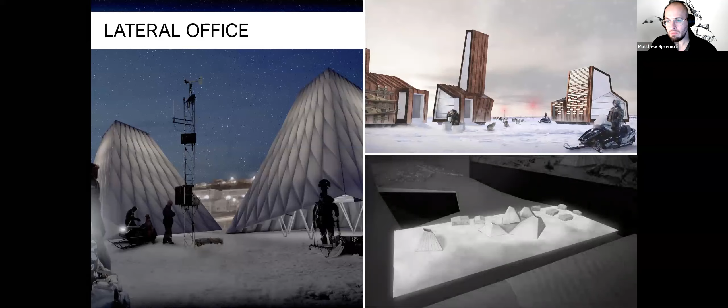So generative design, for me, I can always say that I really wish I had these kinds of tools. These are some examples of my previous work. This is from when I was with an office called Lateral Office, imagining what Canada's Arctic would look like from a design perspective. You can kind of see that a lot of the designs are meant to have a performance element, how well will the structures perform relative to wind, snow or sunlight. In a lot of cases, we as a team were not able to explore many options because we didn't have the tools to make lots of iterations quickly.

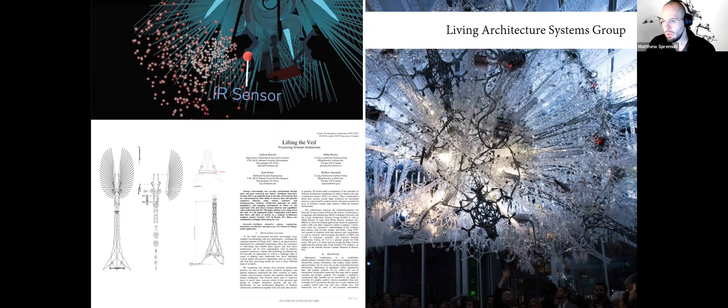And finally, I was also working with a research group called Living Architecture Systems, and it was a similar challenge. We were making these interactive and quite immersive installations. The challenge was how do we balance the goals of having these pieces be interactive, with the audience below, along with fitting into the space and performing to a degree with the environment it was put in. As you can imagine, with all this detail, it was very challenging to make iterations. That's why generative design would have been also handy in this situation.

Generative design comes into play when I'm trying to explain to students how they can leverage parametric design tools such as Dynamo or Grasshopper to be more useful for a goal they're trying to achieve. Now I work with the Autodesk Technology Centers, and I helped found the Toronto, Canada chapter Technology Center, where I get to work with people exploring their designs and innovation projects. In some cases, I get to introduce them to what generative design is, both at the product design scale and at even more large scale, such as in AEC.

So my role with the technology centers is generally bundled under what we call Autodesk's Chief Technology Officer, or CTO. Under the Technology Center, I help run an open innovation and residency program that we now call the Outsight Network. But there's two other levels in which Autodesk CTO exists.

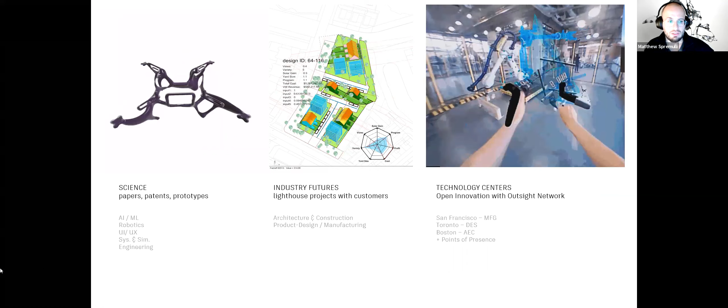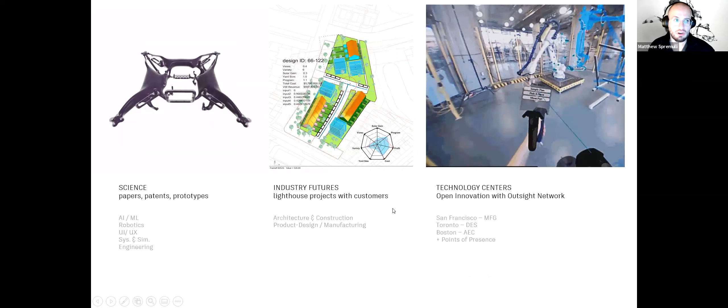Without describing too much about what each group does, I'll just give an overview that the science teams are mostly interested in doing research for papers, patents, prototypes of new software. The industry futures team, they're mostly working with customers on what we call lighthouse projects - very high profile projects that push research, but also are grounded very much in a real project. And as I mentioned, I'm part of the technology centers that helps a very wide spectrum of teams and a very high quantity and volume of teams to achieve their innovation goals.

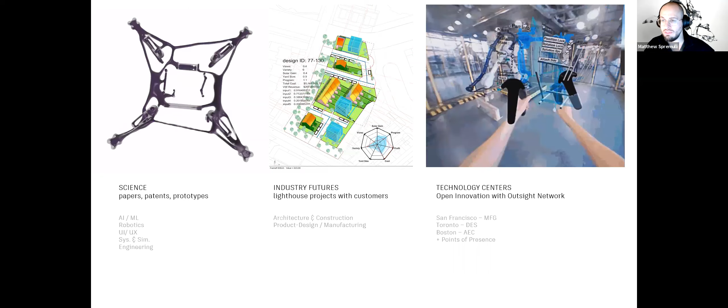So now that you know a little bit about me, I'm going to talk about what we're going to cover in today's talk. First, we're going to talk about what even is generative design. Why is it emerging now? Why does it exist in 2019 and 2020? Why does it come up? And what versions of generative design exist?

Then I'll talk about, great, we have this approach and these technologies - how are people using this to solve real problems? So we'll go over some case studies, both from Autodesk research and from some of the residents that I mentioned in my technology centers.

And finally, I'll talk about tools - how can you start experimenting with some of these generative design for AEC experiments? We'll cover mostly Autodesk Refinery, which is the generative design or generative algorithm engine. But there's also some adoption into Revit 2021 that makes it very easy. And I'll talk about one case study where that is possible.

And finally, I'll talk about how you can get involved with Autodesk. We'll talk about the technology centers and how you can experiment with generative design if you're interested.

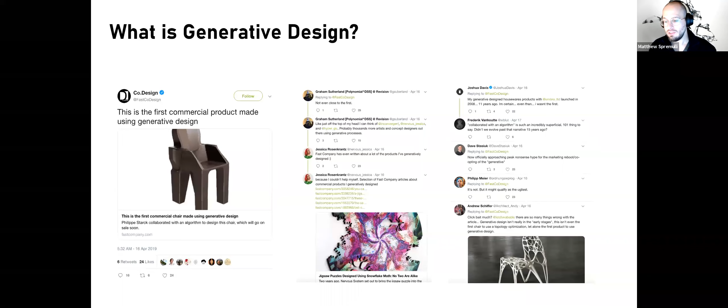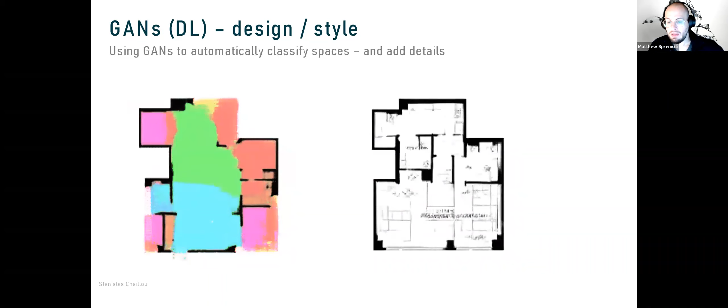And then we entered a different era of design called parametric design, which many people are starting to adopt and become more comfortable with the approach even now. This could be through tools like Revit or even visual programming languages like Grasshopper or Dynamo. And we are now entering another age of design that we are calling generative design.

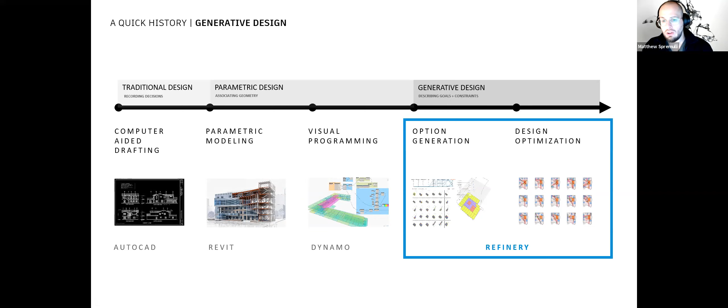This is even further away from the other explicit modeling tools, where you are describing as a designer goals and constraints, and the computer, or more accurately, the software, will come up with options for you or will optimize for you. And so this is what we're going to talk a little bit about further into the talk.

Another way to look at this topic is to basically look at it from a mixture of history and theory and different movements that have contributed to this period we're in now, stretching all the way back to Walter Gropius and Le Corbusier, Buckminster Fuller with modularity concepts, stretching into parametricism and all the things that feed into what we now call architecture and AI.

I like to pause here and to say that generative design is not just about tools, though. It's really a design process, and it's really a design approach. In my opinion, it is really founded on 4 core technologies. There is parametric modeling, things that we're used to, like Revit, Dynamo, Grasshopper; tools like simulation packages. This could be like Ladybug or Honeybee, packages that help you understand what the performance of your design is.

Optimization tools, and we'll talk about that further. This is where the genetic algorithm comes in. And finally, some data visualization tools to see all of the different iterations you might have made.

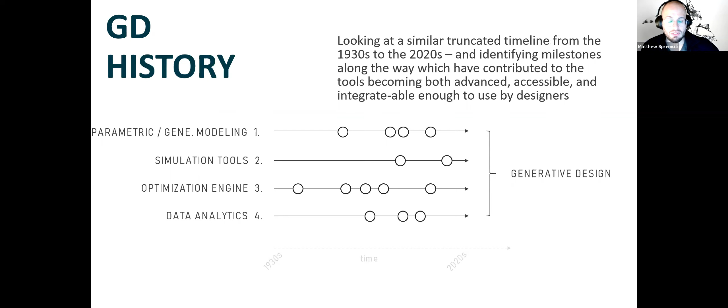So I'm just going to go over a very brief history of fundamentally going from the 1930s to the 2020s, and focusing mostly on the parametric modeling history and the optimization engine history, because the simulation tools can change and can adapt and can be modified to your needs, and so will the data analytics.

So the parametric modeling history can stretch back, I would say, in kind of analog and physical forms to 1905 with Antoni Gaudi's funicular maquetas. These are basically these physical models that helped him, like a Grasshopper script or a Dynamo graph, pull on the different forms and see the impact that it has with these pulleys and weights.

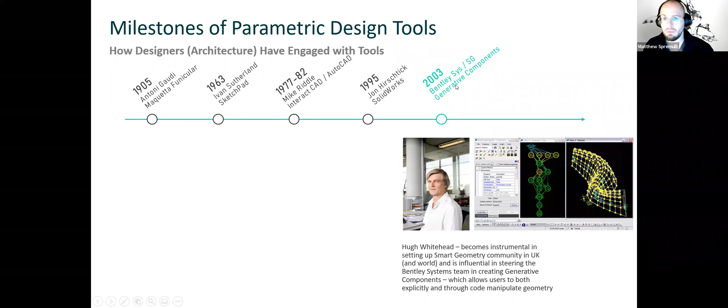Skipping ahead into history, after we get tools like Sketchpad or AutoCAD or SolidWorks, we really start to see visual programming, a combination of explicit modeling and associative rules, show up with Bentley Systems Generative Components. And then, of course, tools like Grasshopper and Rhino show up very well with the plugin Explicit History in 2007. And with Autodesk, we have the Revit tool come out in 2000 and Dynamo come out in 2013.

So we know what parametric modeling is. What about optimization? The evolutionary aspect of generative design is truly critical, that allows designers to spend more time generating forms and seeing how they can lean towards higher performing options. The key thing here is that the computer needs to help decide which option is better performing. So this is where the intelligence aspect comes into play.

And there's 3 figures that are really important to this history. The first, I would say, is Alan Turing, who basically proposes the question, can machines think? And is really seen as one of the early fathers of artificial intelligence. Frank Rosenblatt is an American psychologist who positions the idea that there could be a computer that can make informed decisions. If they're given enough information, they can pick better candidates over others.

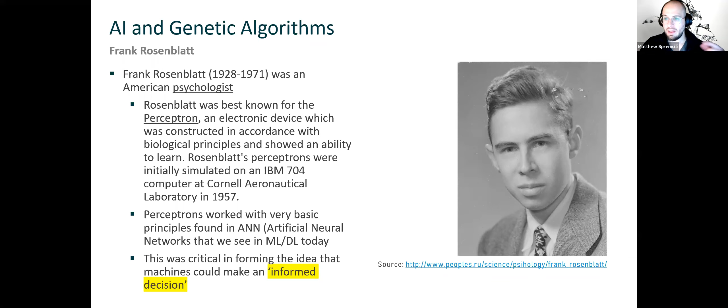And finally, we have John Holland, who only recently passed away, but is an American computer scientist who invented the idea of the genetic algorithm. And he basically proposed the idea that this genetic algorithm would be comprised of 4 primary principles: reproduction, selection, crossover, and mutation. And these are the 4 core principles behind all of the genetic algorithms we use today, whether it's Wallacei for Grasshopper, Discover for Dynamo or for Grasshopper; Galapagos uses the same principles. It's basically all there from this one person.

So again, the recap is that we have these 4 core technologies, and they're all coming to maturity now, 2019 and 2020, so that everyone can combine them together to make what we call generative design as an approach.

So this is where I like to return to my analogy of farming or agriculture. If generative design is about making geometry and then evolving or optimizing the options, it's kind of like farming. Although in this case, we're not farming for food. So what's a good Halloween reference for today? Let's take a look at the case of a pumpkin. This is a very popular vegetable in North America around Halloween time.

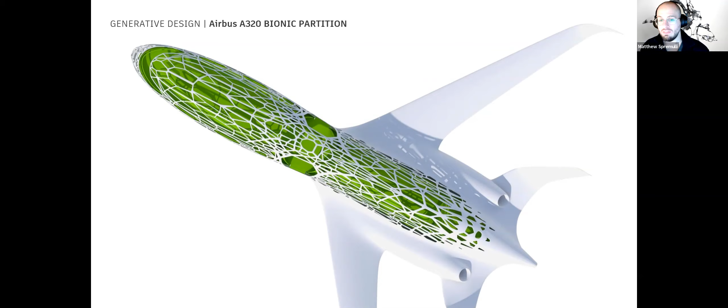So let's talk about these in a little bit more detail. Let's talk about the Airbus Bionic Partition. Some of you might have seen this example, but I'll go over it again for clarity. So Airbus came to us with this amazing project. They're like, this is what we want the future of airplanes to look like. We want it to be very lightweight. We want it to save lots on greenhouse gases. And we want it to feel very open, lots of windows to see the outside.

And we decided, cool, that looks amazing, but maybe we can start with a smaller project to be more real. So we decided to take a look at this, which is a small partition, a wall, an architectural feature even inside of an airplane. If you've seen the Airbus models, this is where the cabin crew sit down. Normally this is made of sheet steel and it's capped off with a few different panels. It's a very dead weight and heavy component.

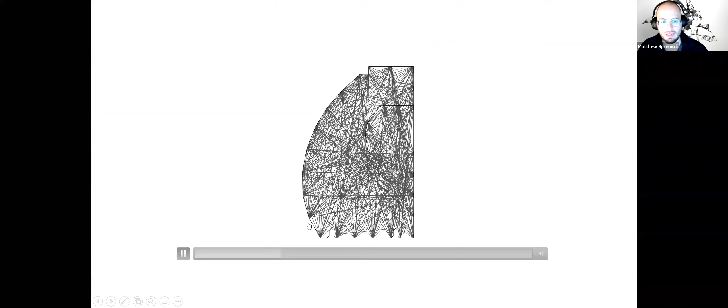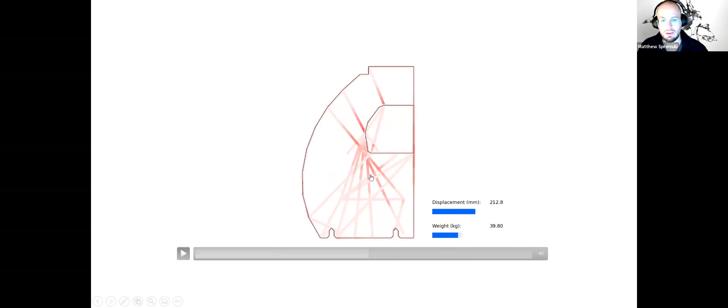So we decided to think a little more creatively about it, which is to break the profile down into its outer profile, and then think about how we could stitch together different trusses in between it structurally. And then let generative design find an option that would be a good balance between weight and displacement. So this is one goal, displacement. This is how far the wall will deflect under load, and we want this number to be small. And then weight, this is another goal. We want this number to be small as well. But if you make it too lightweight, it will displace more. So it's a trade-off.

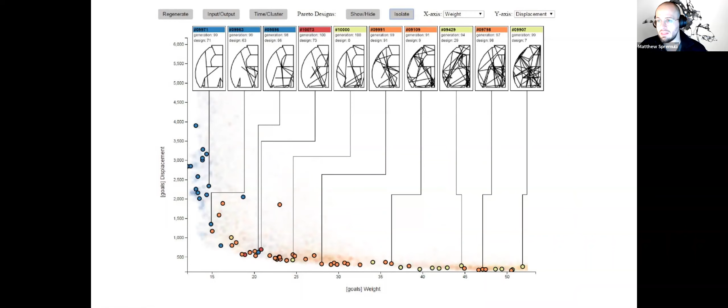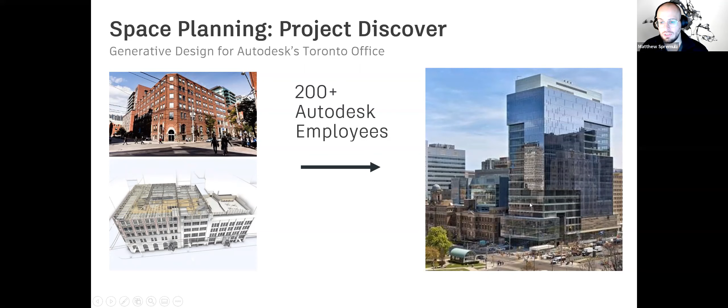So the next project is Autodesk's Toronto office. And here, in this case, we had to move from an old office with brick and wood into a brand new office in the center of the city in an innovation district. We moved from this area of Toronto to closer to what we would call the innovation core of the city. And here you can see that we basically were occupying the first 3 floors of this building.

And when we were making the move, we wanted to interview all of the Autodesk employees. What do you prefer when you are coding, when you are making your products, when you are designing tools? We have lots of different products that Autodesk offers that are being developed in Toronto. And so each of these different groups had different preferences. So we interviewed them all and got all of their different specific attributes of what they preferred in terms of lighting, acoustics, comfort, noise, things like this.

And we were able to combine them all and distill that we had 6 goals that we wanted the design of the office to try to achieve. These were low distraction, so being more quiet; adjacency preference, which is basically having connection to your teammates; interconnectivity, which is kind of in opposition to low distraction, being close to different areas; daylight, which is fairly straightforward; views to the outside with the windows; and work style preference.

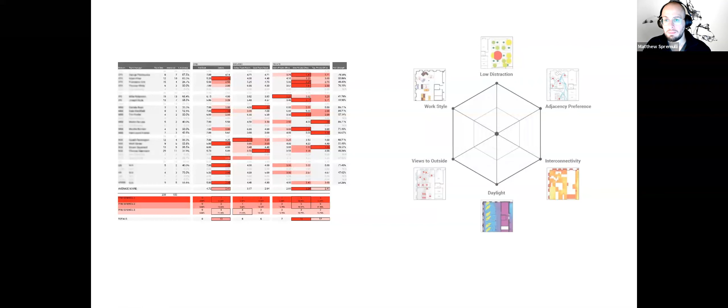Each of these goals needed to have a quantitative, numerical way to break them down. And so for each of these, we had a scoring equation that would then get normalized as a value out of 10 that we could score each design. So in this case, there were some inputs and there were some outputs going from a score from 0 to 10. And here on the right, you're seeing essentially what this custom simulation tool is doing both graphically, and there was a numeric value. Here's what work style looked like: interconnectivity, low visual distraction, and daylight. And finally, views to the outside.

So it was great that we had these goals. And now what we needed was an architectural concept to tie it all together. And so we really like the idea of thinking that an office is like a small city. A small city has lots of neighborhoods, lots of different districts. And so that's what we would make each of the product teams. So for example, here there's a group working on Fusion 360. Here is Autodesk Research. Here is Autodesk Sketchbook, Alias Automotive Tools. So each of them had their own specific area.

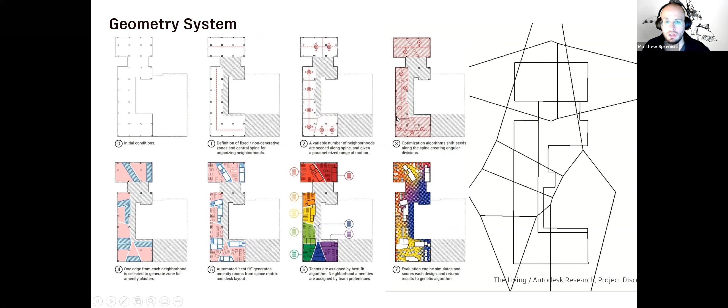And how did we imagine this coming together? This is basically how we laid out the geometry of the office. So we basically had the initial conditions of the office. We had some zones that we could not touch in gray and a main path. Each of the different neighborhoods had a center and could move back and forth. And it would make essentially the cell of a Voronoi that would make the edges of these neighborhoods. And they could move around, they could shift.

One edge of the neighborhood would have what we called an amenity area. This could be a lab, offices, meeting rooms, VR labs, things like that. And then we would lay out the desks afterwards. And each time we did it, you could move these around and it would automatically update all of the goals. So here on the right, you're seeing what those look like. And here's this little animation of blocking it out, laying the spine, putting the centers with the Voronoi, letting the amenity bar show up with the meeting rooms, desks, and then seeing the goals each time.

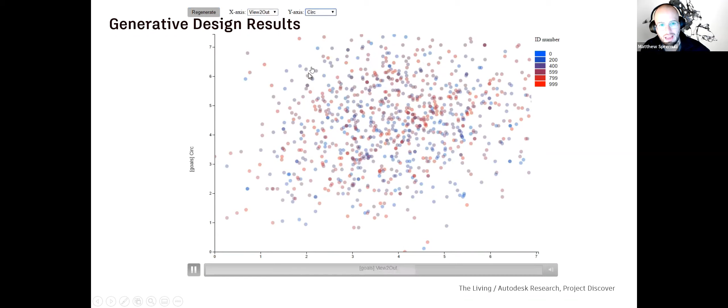And then we let the algorithm run. And the algorithm ran 10,000 times. So we had 10,000 floor plans to choose from. And always with generative design, there's the challenge of what do you do with 10,000 options? So this is where the data analytics tools are helpful. Here you can see all the different iterations getting plotted on the goals of circulation or views, and you can see how they look when plotted on this graph.

Once we selected one version, this was again interviewing all of our employees and seeing which ones they like. We were then able to take a final version to completion. So this is what our neighborhoods looked like. And we finally took them into Revit for detailing. And now we're all moved in and we are almost 3 years into this project. So a lot of people will ask if we'd like to modify it. And that is an ongoing research project to see if we can monitor the inside with sensors to see if we can pick up data that would adjust the interior.

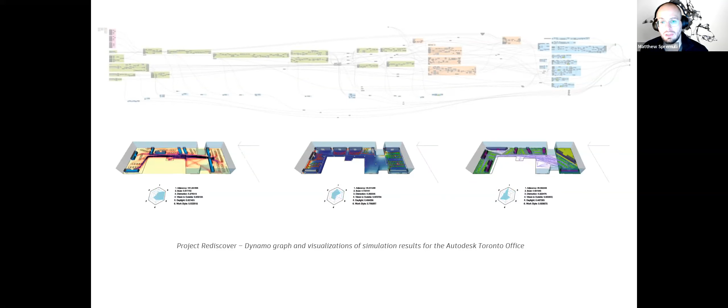And if you want to experiment with this graph, I can share with you a link afterwards. We made this Dynamo graph public, so you can access it. One of our researchers has shared the entire Dynamo graph on his blog called Through the Interface, and it's called Project Rediscover. And I'll share with you the link after, and you can play around with the Toronto Autodesk office.

And if you're wondering, I sit right here, if you ever want to mess around with my office.

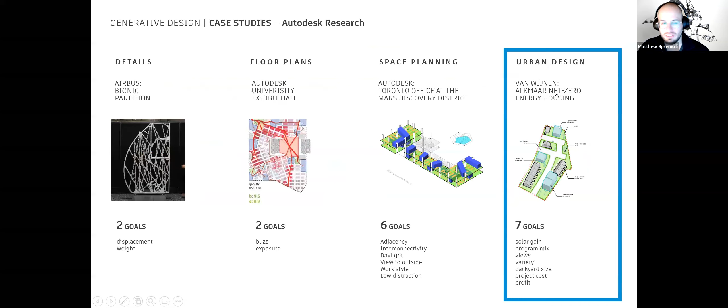So a final project from Autodesk Research is with this group that we worked with at an urban scale called Van Wijnen. Van Wijnen is a Dutch housing company, and they make prefabricated homes that are modular. They're very forward thinking. They like to use augmented reality to see how to lay out the mechanical, electrical, and plumbing of all of their prefabricated components. And they like to experiment with technology even at the larger scale.

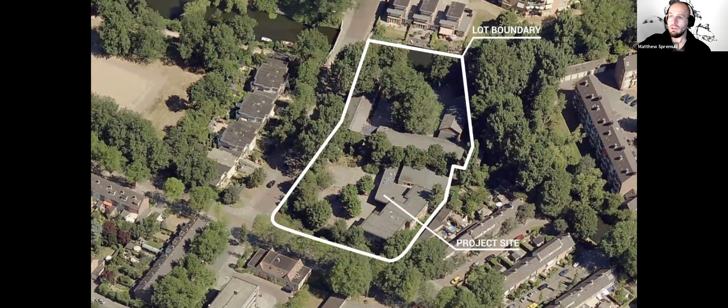So this was one place that they wanted to introduce a design, and they wanted to use generative design to imagine lots of design options. So really they have 3 units that they work with: a single story unit, a double story, and a triple story unit. The trick is, where do you put which units on the lot? So we needed to understand, like the Autodesk office, what are the constraints? What can we not touch? And what are the things that we need to stay or stick with?

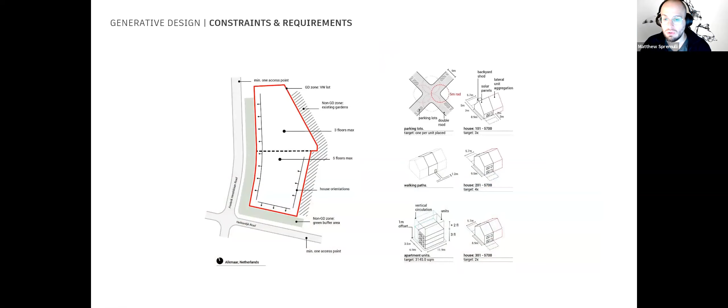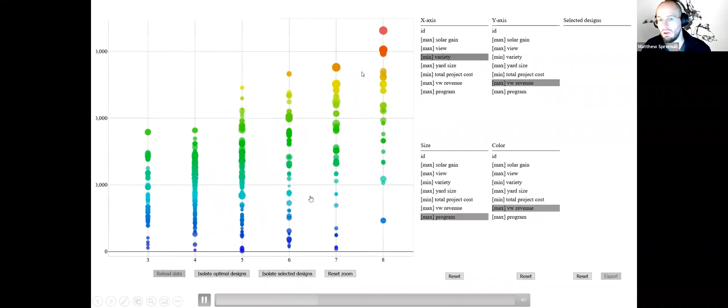And similar, in this case, you can see the data analytics technology is getting better and better. This is now using Autodesk Refinery as a tool. So it's no longer Autodesk Research. It's now an Autodesk product. So here's different ways of seeing the designs and them being laid out, and how you can organize them on an X and a Y axis, as well as with size. So the bigger the circle versus the smaller, and the color. So lots of ways to see your design ideas.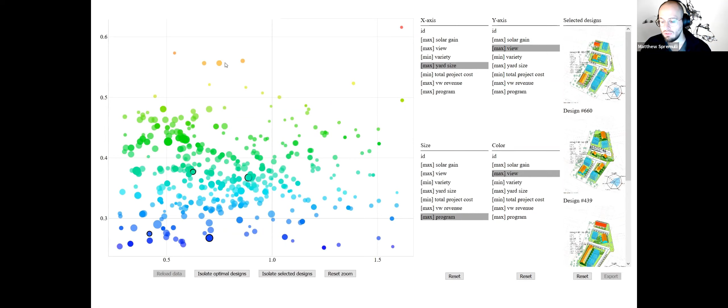Like the other projects, we selected a few candidates that were well performing. There isn't one good one. There's usually many options. So we had to take a few options and go back to the customer and say which ones make the most sense to develop. So Van Wijnen was so happy with this process that they wanted to turn this into a tool that they could use for any site. So they wanted a generic tool that they could apply to new projects.

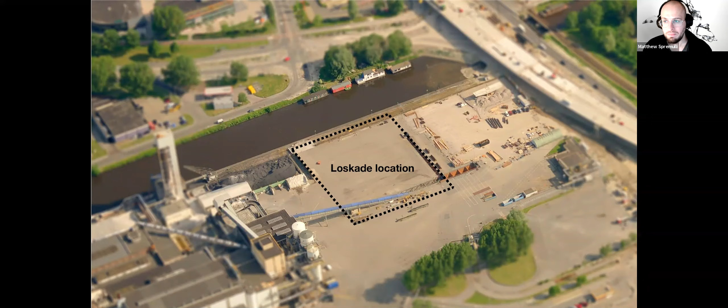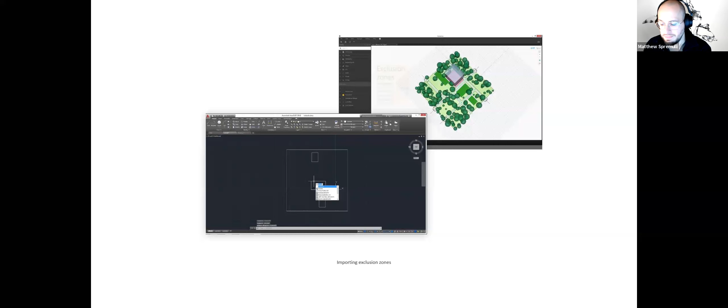So the process is usually where you have your constraints and requirements and you generate a form. You then see how well it scores to your goals, and then you evolve the design over and over until you get options that you really like.

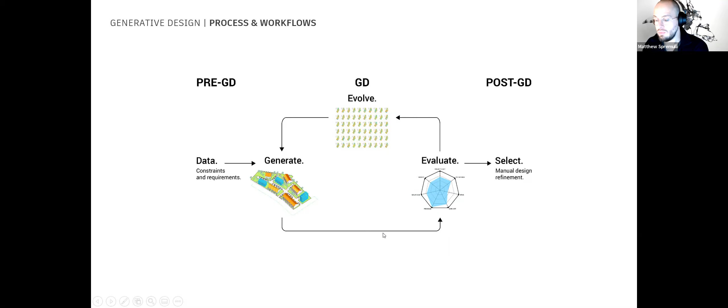So how are other people, how are customers using this who are not related to Autodesk Research? These are examples that I've helped with in our residency program at the Technology Centers. The first is a short video that I'm going to let play.

Let me know if the audio comes through. Can you hear? No? Oh, darn. Okay.

Okay, I'll talk over it. Sorry about the technical problem.

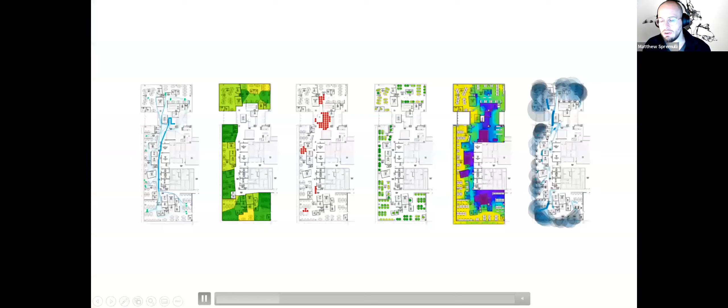So what we did is we ran a 2-week program in Toronto where we invited 6 teams to come in to try out the software. So we had University of Toronto professors, we had people from MIT, we had Arup Engineering, we had a construction company, a Brazilian startup. So lots of different groups, a very wide spectrum. And we wanted to see what they would do with their projects.

A way to get feedback on the tool and to get a chance to see what people would solve with the new approach. So we ran it at our technology center in Toronto, and I was working with some collaborators from research to work with all of the different participants to come up with their designs.

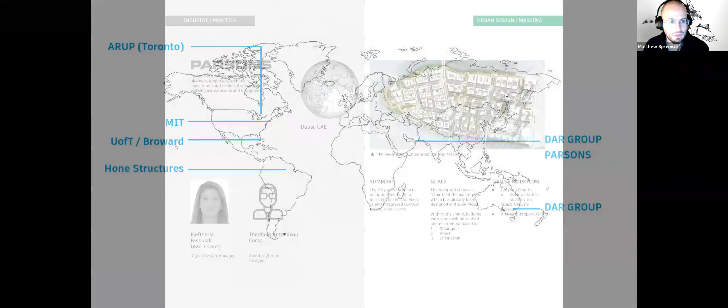So we had Arup in Toronto, MIT, University of Toronto, Florida, Broward County, Hone Structures from Brazil, Dar and Parsons Group, and another group from Dar to join. And I'll talk about a couple of these projects because maybe these are similar to challenges you have.

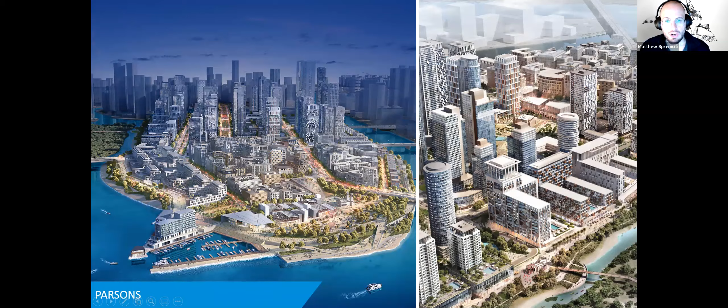So with Parsons, they are a big construction and contracting company working mostly out of the Middle East. And they had this big project, a master plan for a city in Reem Island. And this is an artist's conception of what it will look like. But they knew that it would be broken into these general quarters or neighborhoods. But they needed to know what each of these blocks will look like.

So towers and podiums, how does it work? How should they be designed? So there's many options that they could pick. 1 tower, 2 towers, mixed podium. What's the best solution? And they decided to look at all of these different options in Dynamo and then be able to essentially test them according to goals related to sun analysis, courtyard size, sun exposure, views, and how much gross floor area or GFA they should include.

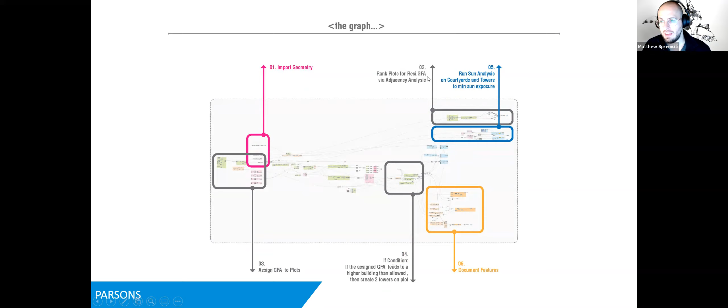So here are some examples of them looking at a podium plus a tower and seeing how well it scores to main attractions for views. And the second goal that they really wanted to get, because it's in Abu Dhabi and Dubai, they really needed to make sure that the courtyards would not be too hot, to be comfortable outdoor space.

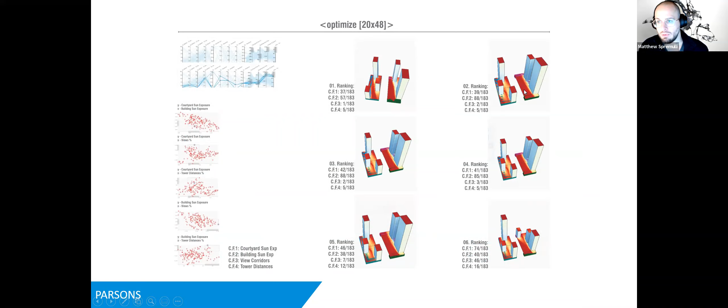A second team was from Brazil. They're called Hone Structures and Bravo Engineering. They really wanted to make expressive, occupiable trusses or concrete beams. And they thought that this was a great aesthetic to pursue with both architects and engineers. The challenge is, how do you lay out the rebar or the reinforcement bar inside of these uniquely designed trusses?

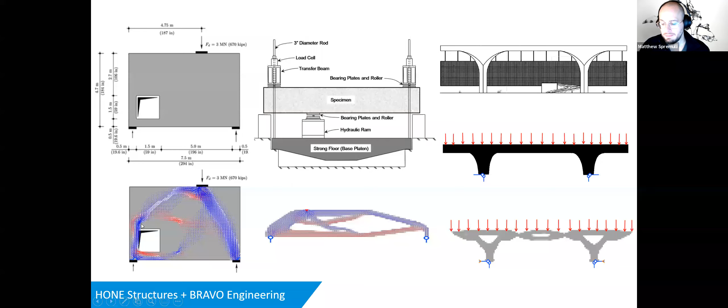So they brought it to a research level where they wanted to take a simple object, apply a load and an obstructing feature, and then find the most optimal shape it could take. So here they're experimenting with some of our other tools in Autodesk. This case, it's Fusion 360. And they're using Fusion 360 to apply a load and then see where the predominant stress lines will show up in that wall of potential concrete.

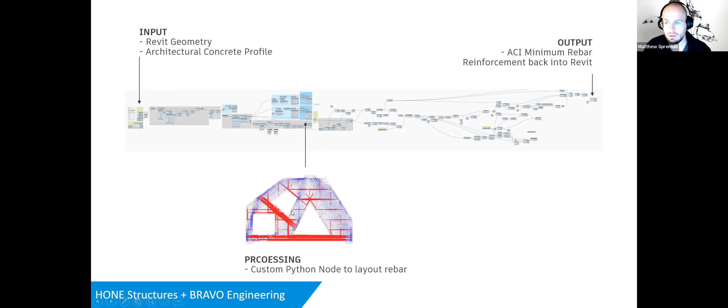Once they had that shape, then they brought that shape into Dynamo as an input, as a Revit geometry piece. And the output is that they wanted to have the minimum rebar reinforcement. And in the middle, they made their own custom Python node to help lay out where the rebar should go. So in the end, they were able to finish their script, which was great, and start to make physical prototypes from this experiment.

Speaking of concrete, we have other construction companies using the same technology now. So in North America, there's still the preference to have concrete laid out with formwork like wood structure, but people want to start getting to 3D printed formwork. So we have a construction company in the program that has tall towers, and they want to know what is the best way to lay out the formwork for uniquely shaped towers as they go.

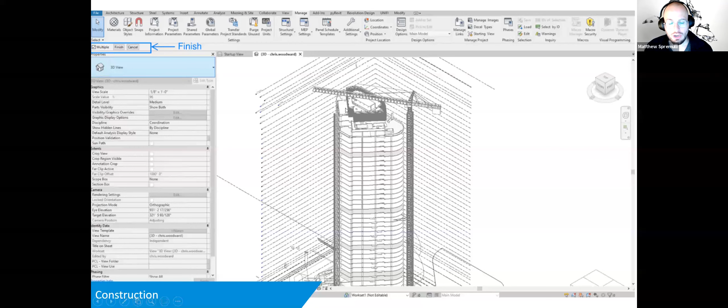So in this case, this is using Revit 2021, and you can see that now you can access generative design right inside of Revit. So you don't even need to use Dynamo if you have a simple program. In this case, they broke the tower down into the profile, and they were able to see what the supporting buttresses of the concrete should look like. And they needed to know, if they're going to 3D print this formwork, what is the optimal geometry that this formwork should be laid out as.

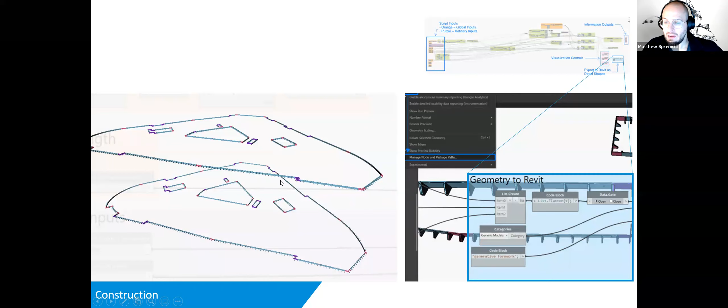So here they want to minimize the shortest pieces. They want to reduce the amount of 3D printed pieces. They want to minimize the unique pieces, so reuse more and more pieces, and minimize the volume. And you can see here they're using Refinery in order to get an option for the concrete.

Okay, so I'm going to take a quick break. Yuko, maybe we could ask everybody if they have questions so far, or if they have ideas about what they would maybe use generative design for. Yeah, sounds great. Okay, thank you for the presentation.

Here's a good example. In real life, we had our Autodesk employees say they wanted something called adjacency preference. What is adjacency preference? It's not like daylight or views to outside - those two are easy to measure, there are tools and plugins that can be easy to adopt into the workflow. But something like adjacency preference and interconnectivity are very subjective, and we needed to take it from a subjective idea and turn it into something that could have a formula. So you do need to try to find a way to turn it into a quantitative formula number.

This is where the art of designing with generative design comes from. It's a challenge, everybody knows, but that's the only answer I have for you right now - we had this thing which was shortest path plus a vertical multiplier. We had to come up with our own tools to measure what adjacency preference could be.

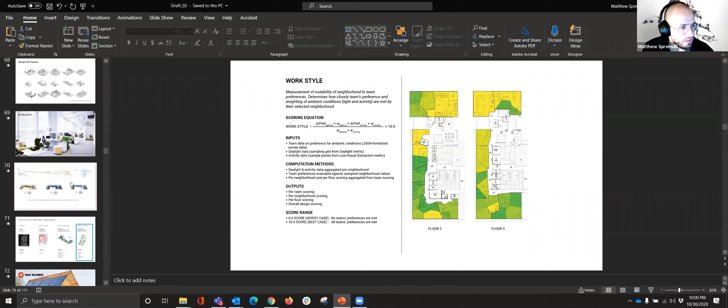Yes, so let's say we are looking at our Dynamo graph. For each of the goals, if it's a custom equation, you would make that custom equation inside of an equation node inside of Dynamo, or something like a Python node if you wanted, or you could build it more manually with lots of different nodes together. But you can change it at any time - it's just how you want to measure each of your designs.

Okay, thank you, thank you. That was a great question. It's always hard to work with quantitative, qualitative measures. Does anybody else have a question or a comment?

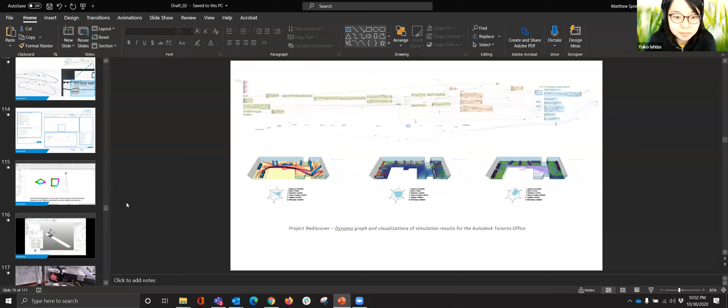Also, I have a question so far, and thank you for the presentation. There's a lot of possibility for how we use generative design, but I have a question for each project - how do you divide the tasks? You are making Dynamo code for each goal, and I'm interested in how you work as a team to develop this Dynamo code, because for me it's really difficult to divide the task in Dynamo, and we always run out of time because the Dynamo coder is only one person, or we cannot collaborate well. How do you experience that?

That is another great question. So usually what our research teams do - let me see here if I can find a good example.

Yeah, okay, let's see. Usually what we do, I guess the office is the best one I can think of. So we usually like to divide it up into two primary tasks.

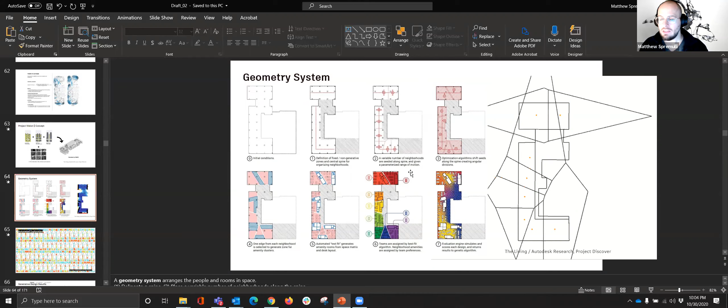Task number one is to come up with the geometry system. This is like parametric modeling. It's really no different than what you would normally do with Grasshopper or Dynamo. Someone needs to have the geometric rules for how the design should work. That's usually one team's task. They just experiment with the geometry.

The only special consideration for generative design is to make sure that if the algorithm runs automatically, it will not have a null condition. This means that it will not produce geometry that results in a bad value later - this could be like a value of 0 or a null condition in both Dynamo or Grasshopper.

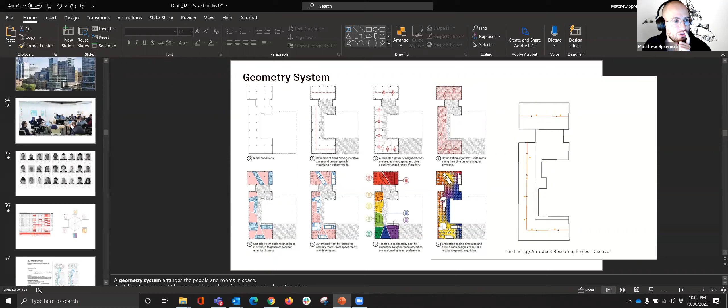That's one team. The second team is to do what we were talking about here, which is to understand the goals - how do you measure if your project is performing well? This is one team's task completely. They either find plugins or packages or add-ons, or in the case of these instances, they came up with their own tools, their own way to measure performance.

So those are usually the two primary teams. One to make geometry and one to score the geometry with the goals. And these two teams work together.

So in this project, how many people working on Dynamo programming, I would say? In this project, there was like 4 people.

So 2 people to come up with the architectural idea and the geometry. So in this case, this idea of the city inside the office, that plus the geometry is 2 people, 1 team - geometry system. And then the goals was 2 other people.

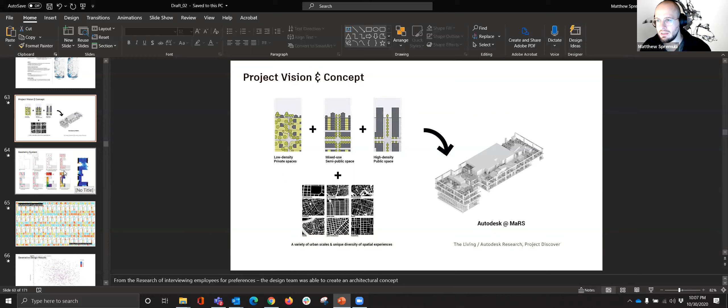I know the whole process to interview people and to get the scores took many months. Yeah, I can imagine. Yeah, that is the most time consuming part, I think.

And then the design of the layout itself, especially with the more simple goals like views to outside and daylight, probably only a couple of months, maybe even shorter than that. But it was really these other goals that were harder to calculate.

And then each time you make a design, you want to test it with the genetic algorithm to see if it's giving you good results. So you usually, at this time, this is now like a 4 or 5-year-old project. It took many times to get 20,000 iterations, and you'd have to see which options were good or bad.

Many clients for me, they really want to try this generative design, but I always try to explain how many people we need and how long, because generative design you need to have iteration, and if the task is bigger and the model is bigger, each iteration takes time. It's not like, you know, the video they saw is 5 minutes.

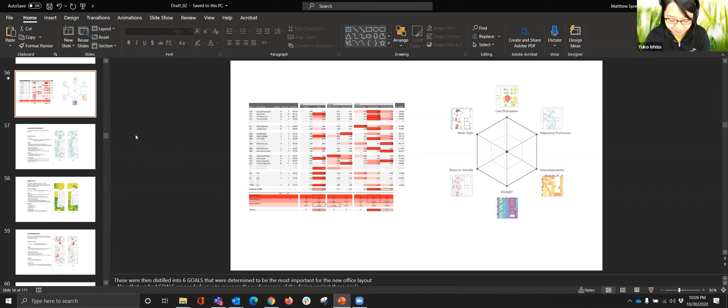And they have like 20,000 results, and they think, oh, that is really cool and easy to get a result. And I always explain that that is not the time of making a project - it's the time to see the result. So it's not like in a couple of hours you get the 20,000 results in one click. It's a long time to get that good result.

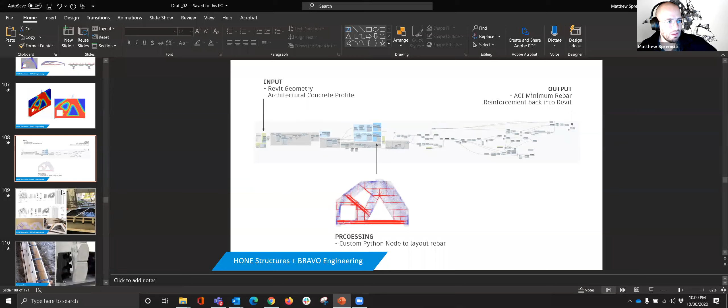That's interesting. Yeah, that's really a great presentation that you explain generative design as a metaphor for agriculture. So you can imagine, like agriculture, you don't expect how the thing grows, and temperature and weather affects it. So you can never perfectly expect the result. The explanation was great. I really want to use that metaphor for my client as well. Thank you very much.

Yeah, okay. And well, I mean, for those of you that are interested in the tool itself, I can talk a little bit more about how Project Refinery operates in Dynamo, if that's interesting.

Yeah, I think all of us are really interested in those as well. I think most of us are Dynamo users, but in Japan, okay, there's not many projects in Dynamo, so we more like experiment ourselves, not real projects though.

Okay, so I mean Dynamo, if you're familiar, sounds like everybody knows it. The way that I usually like to explain what generative design in Dynamo is, is that it's an extension to Dynamo 2.0, so you can now access it as a public beta. If you want to experiment with it in Dynamo, if you have Revit 2021, it comes already inside. It runs locally, so it's not using cloud processing, which is good. That way you don't have to borrow Amazon Web Services or something.

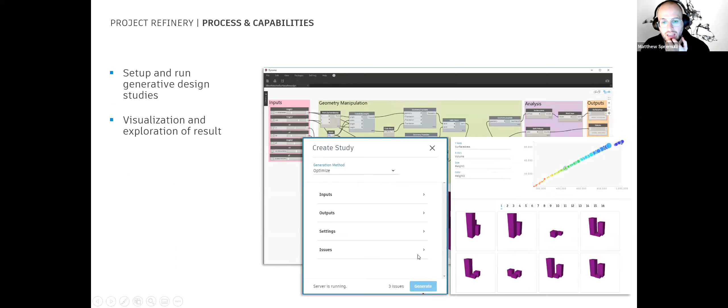So your parameter values are your inputs, your performance metrics are your outputs. Everything else is fairly straightforward. Usually the analysis, this is where those formulas come into play, like how to calculate daylight or how to calculate something else. And then in here, the output is just a final number, just a quantity. It has to be a number so that Refinery knows if it needs to maximize or minimize a value.

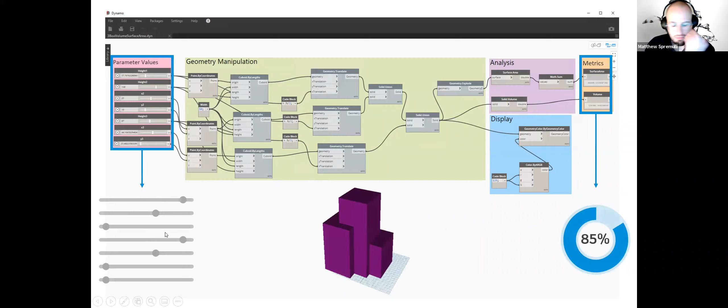So in this case, with the 3-box problem, we can basically see that Refinery will take all these inputs and play with the sliders on your behalf, and each time it plays with the sliders, it gives you a score. So Refinery does this in 4 ways. Actually, I really like Refinery versus tools like Galapagos or Octopus or Wallacei, because it gives you the option to play with these 4 things.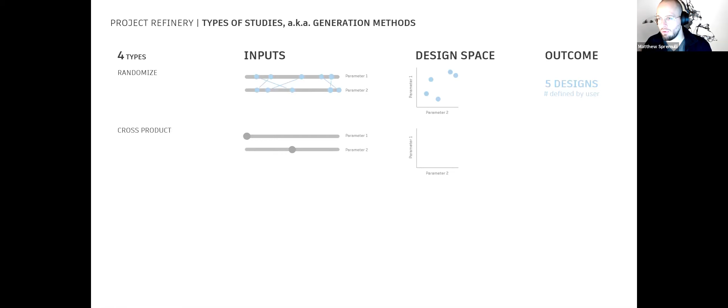Option number 1 lets you make options. It says, I'm going to randomize your sliders. So it'll play around with the sliders and it creates your design space on the X and Y axis in terms of options that you can make. And you tell Refinery, stop after, in this case, 5 options, but you could say 5,000 options. It doesn't get you to high performing options automatically, but it will show you where they sit in your design space, and it will show you how they perform. It just won't curate them or evolve them to higher performing.

Then there's cross product. This one's also fairly straightforward. It says, I have 5 in this parameter, 3 in this parameter, and I'm going to make all these options. And again, you say as a user how many samples you want to see.

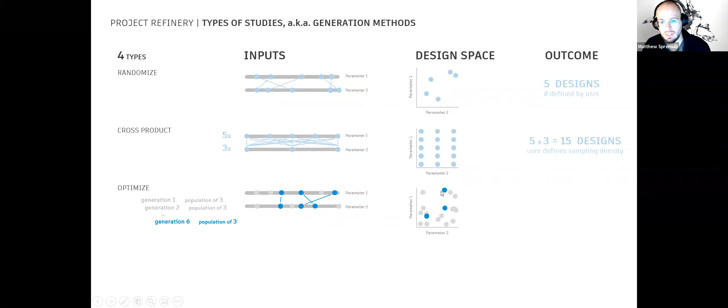Then there's the optimize option. So you say how many generations you want and how many populations inside of that generation you want. And the software will start to make one generation, evaluate how well it performed, and then see which sliders were better. And it'll say, oh, slider 1 is better when it's over here, I'm going to try that one again and see if I get better performing options. So we'll repeat until eventually you start to see special ones. You can see that in the random, these ones did not show up. It's only here when the software iterates on your behalf that it can find these higher performing options.

And this fourth one is the one I like a lot. It's called like this. So if you've ever played with sliders in Dynamo or Grasshopper, sometimes you find a spot that you like, you're like, oh, those are good, and you don't want the software to mess around too much because you know it's going to be good there.

So this one is like, okay, I know that I have these ones here. Great. Now I'm just going to wiggle the parameters just a little bit left and right because I know there's some good ones around here. So it does a little bit of optioneering for you, but you say, give me a band to say how much it can be like this.

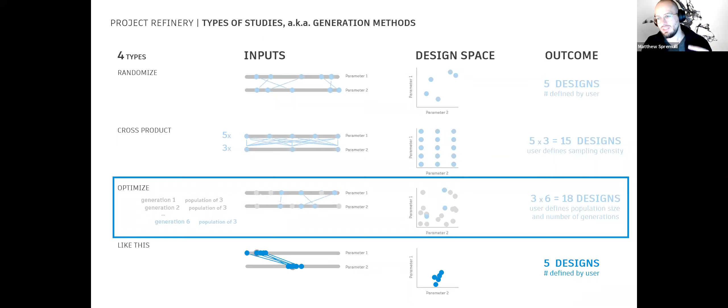The real magic comes in the optimization. This is the one where the software uses a genetic algorithm. Everything else is just optioneering. There's automation, but there's no decision making by the software. The optimization is where the software observes the goals and it observes how well it scored to those goals. And it says, oh, slider 1 is better over here. Let me try again. So it learns which one is better. And so that's where it starts to, over time, get you to higher and higher performing options with that genetic algorithm.

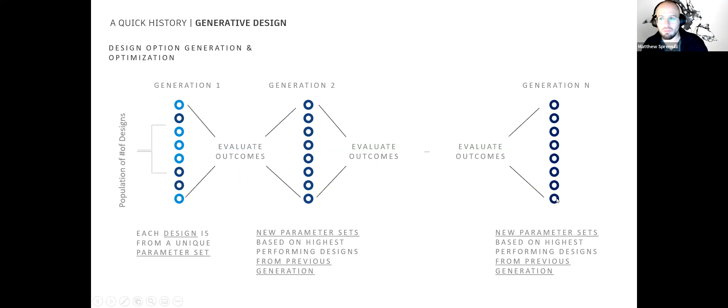So a good example is slime mold. Lots of options are made, but only the really good ones are reinforced. So this is slime mold going towards food, and you can see all of the options everywhere, but then it stops and it only finds the really good ones. Slime mold behaves just like a genetic algorithm.

So whenever we're talking about how you can talk to your clients or your customers or even your team about how generative design affects your work, usually what happens is that most of the time architects are in here. If you've ever seen Rem Koolhaas' Office for Metropolitan Architecture, you see he has interns making lots of options, lots of iterations. And sometimes that's cool, but most of the time, designers want to think about the concept, the goals, and then they want to have fun with the details and curating what examples they've made. So what generative design does is that it pushes more time for the designer to be in the concept and the detailing phase.

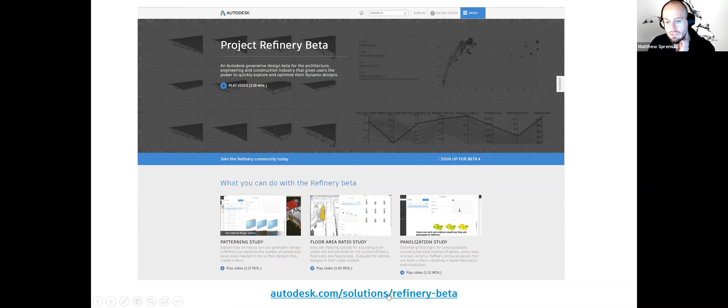And then I was just going to talk a little bit about the technology centers to see if anyone would be interested in how this could support their work. So the technology centers are basically a place where Autodesk helps external teams to explore the future of making. And we bring together everybody. They can be academics, they can be in construction, fabrication, design, and we really want to help them to make innovation, like using generative design for a problem. This is like a network of participants, and Autodesk gets a view of what people are doing in the future. In order to see that, we give them a lot of resources at no charge.

So right now we have 3 centers physically. I'm in Toronto, but we have one in Boston and San Francisco. And we have lots of different workshops. And now we're starting to make places where we can support new participants of the network in locations with Autodesk offices. So there will be some in Tokyo, Singapore, Melbourne, Sydney, Birmingham, UK, Munich, and Barcelona. And right now we have 450 teams that have been in the program. These are 350 organizations. They could be startups or academic groups, labs, customers. We've had 20 different countries, and we've had 2,000 residents so far.

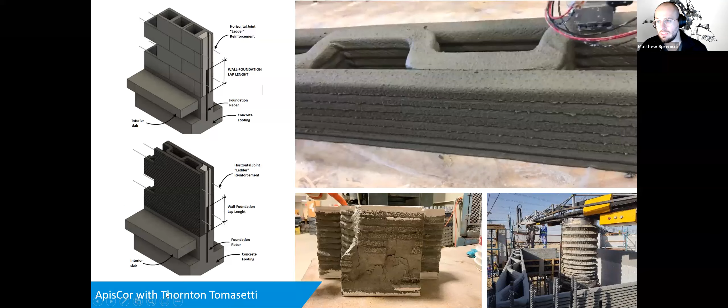Academic teams, sometimes they host special courses. We're starting to get the University of Tokyo to be interested in joining the program. A few different labs are interested. A good example is AMBOTS out of the University of Arkansas plus ETH Zurich to have mobile robots to print big examples. So lots of robots working together to make bigger projects.

If it's entrepreneurial or startups, basically like this company, they're making robots for underwater or challenging conditions in outer space. They work with NASA, they work with the Office of Naval Research in the US. And for them, this was a great program to help them prototype lots of different robot options.

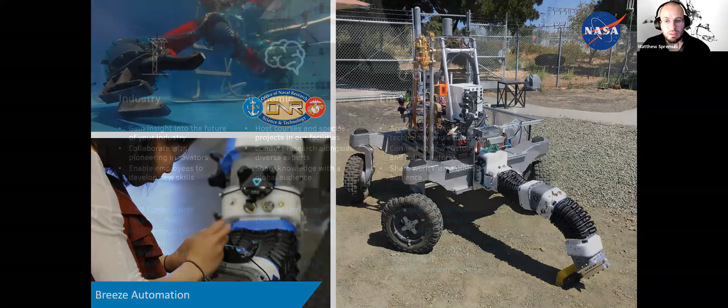And finally, network. We have, I mentioned, companies like Unity, Boston Dynamics with the Spot robot, Microsoft HoloLens, and the Association for Manufacturing Technology. We work together with them to promote some programs that are similar to both companies or organizations, and we can work together to promote each other and to make interesting programs.

So how do the technology centers help? Well, we connect teams together. We can advance their knowledge of technology and even in some cases grant them some technology. And we help them propel their innovation. So we usually offer teams all of these different things. I can share some of this afterwards.

But examples are here. We basically do design critiques or feedback sessions with residents. So in this case, this is someone who has a design and we're saying, oh, maybe you want to use this CNC or this mill instead of another one because you might get a better finish on your product. We can show different examples live in the demonstrations.

We bring everyone into our Slack at Autodesk. So in this case, we're working with GHD Engineering to look at some machine learning for their drawing sets. And in this case, we're even able to give them snippets of code in Dynamo, so we can work directly with you on Slack.

We can give a little bit of training. We don't cover all the products. Autodesk has a lot of products, but we do support Fusion 360 a lot to help people make things. And we like to elevate resident work, so promote resident work. So we have a Vimeo channel where we basically showcase lots of different teams doing their cool work.

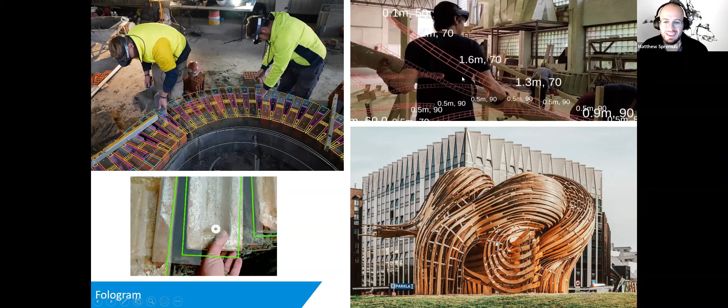Examples of outcomes from sharing work: Fologram, they develop augmented reality holograms. Actually, Yuko, you might remember this team from RobArch 2018. They were the winner of the workshops. Yep. And they're now a resident. And they gave a presentation and then they got to work with a construction company out of Boston to use their tools on site.

We also host panels to talk about topics. Like in one case, it was design and construction for mass timber. And it was really great. We had a lot of different insights from architects, supply chain, designers, all talking about what the impact of mass timber will be.

And then we promote our residents also with Autodesk publications. So in this case, we will sometimes showcase that project with the robotic company 3D printing concrete. They're in Redshift, even in Japanese. Hone Structures, the generative design company, they were also doing stuff. So lots of examples of how we can help promote your work.

And if you're interested, you can see this URL here, autodesk.com/technology centers. And if you want, you can apply, or you can reach out to me at any time and we can talk about your project. So again, I'll stop here for now and see if anyone has questions. Thank you very much.

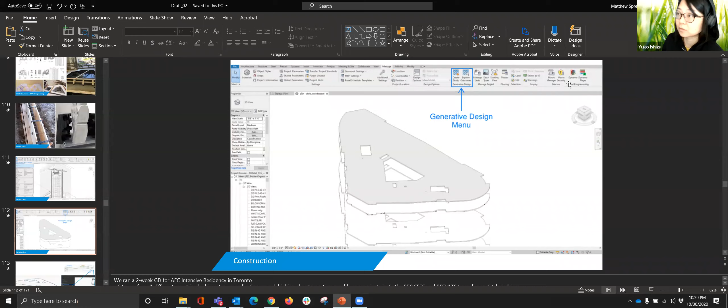So I have a question about generative design as well. In Grasshopper, we have Galapagos, and we have two types of solver, the evolutionary solver and the simulated annealing solver. Sometimes the evolutionary solver doesn't really work well, and the simulated annealing solver works better because each parameter doesn't have a relation. I use both solvers, and sometimes it's really easier to work with the other algorithm. So in this generative design, do you have any option to switch the solver or the algorithm for finding options?

That is a good question. Right now, the simple answer is no. You, as a user, do not have the option to tweak the way that the algorithm works. So if we go back to here, in Galapagos or Octopus or others, like Wallacei, which I'm also usually experimenting with, I can change reproduction, selection, crossover, and mutation. I don't know if I really always need to or want to, but with those tools I can.

With Refinery, there are plans to make these four elements exposed to the user, but they wanted to make it simple for now so that more people can experiment with it without worrying about too many parameters to set up a study. I see. Okay. I understand.

In the future, hopefully, this is more like a request, but maybe different types of algorithms to experiment with. I think these parameters are really important when you use generative design or a form-finding type of approach. You always end up changing those little parameters to find a better solution. So tweaking parameters, not only the geometry or the goal, but also the algorithm itself, you end up experimenting. So I think that approach, if we have it, is great. I agree.